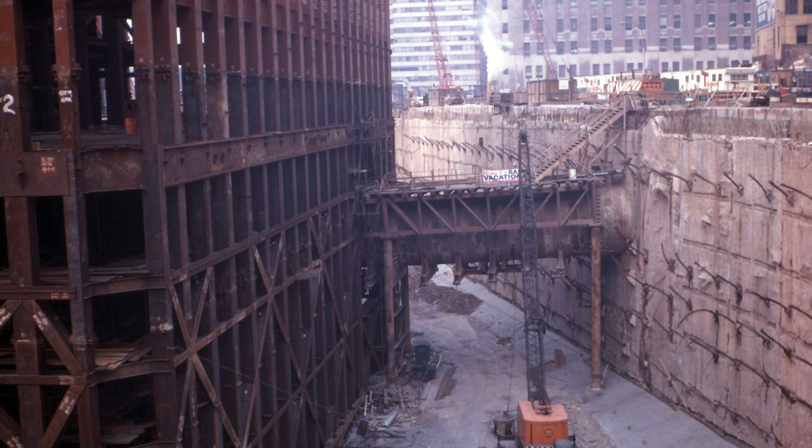All right guys, so today we are going to be talking about the long, extensive process that was the birth and the building of the Twin Towers. This was around a 20-year process that started all the way back in the 1940s, believe it or not. Of course, the towers weren't even theorized until the late 50s, and then the actual model came out in 1964.

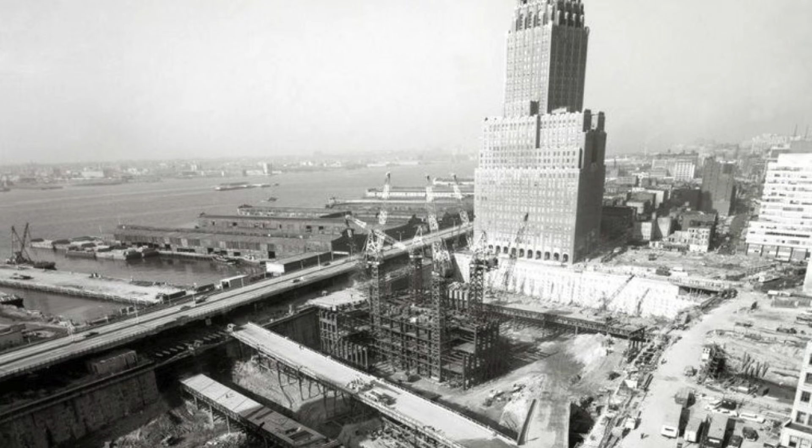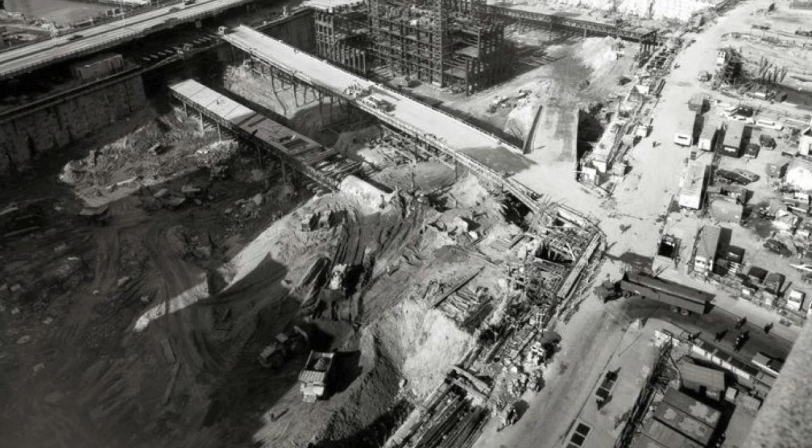But going all the way back to 1946, a year after World War II had formally ended, New York State passed a bill that called for a 'World Trade Center' to be established. This trade center would increase New York City's role in transatlantic trade. The World Trade Corporation was founded, and a board was appointed by New York Governor at the time, Thomas E. Dewey, to develop plans for the project.

Construction starts on One World Trade Center. Now, One World Trade Center was the North Tower. It was taller than the South World Trade Center despite being identical—the reason it was taller was because of the antenna. If you ever have trouble determining north versus south, the antenna is the easiest way. The north was always bigger, and it started construction first, in August of 1968, so it had a little bit of a head start on the south.

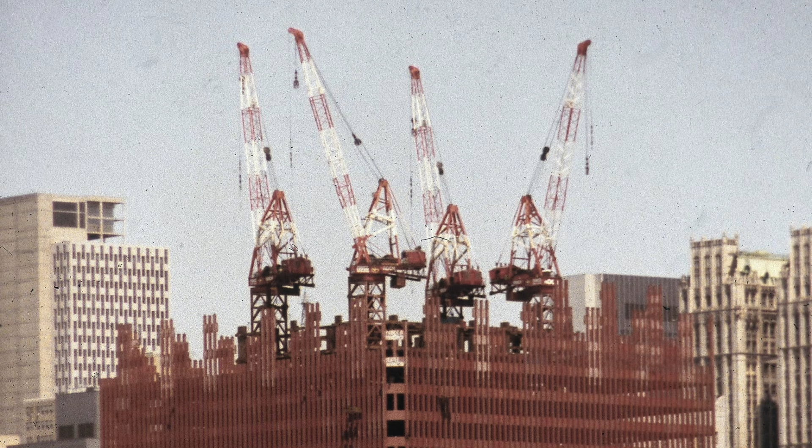I've done a review on it—basically it split in half when the South Tower fell, and then it was completely destroyed outside of one of its corners when the North Tower came down in regards to 9/11.

One World Trade Center was officially opened in 1970, with Two World Trade Center opening in January of '72—about a year apart in terms of the North and the South Tower, with the North opening first. The entire complex with all 7 buildings was officially completed in May of 1987.

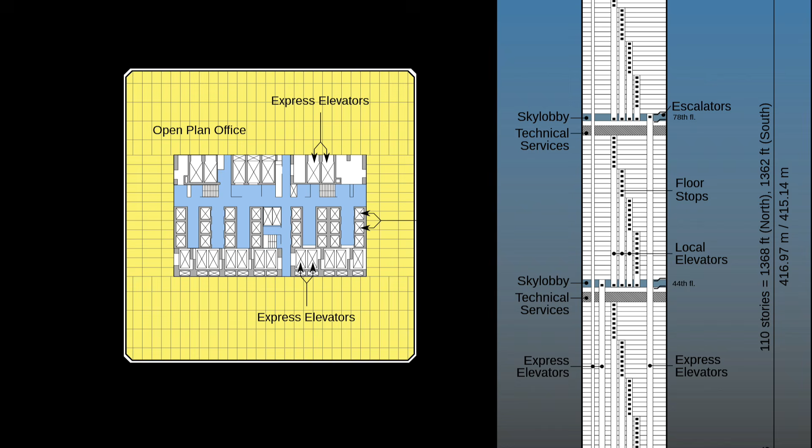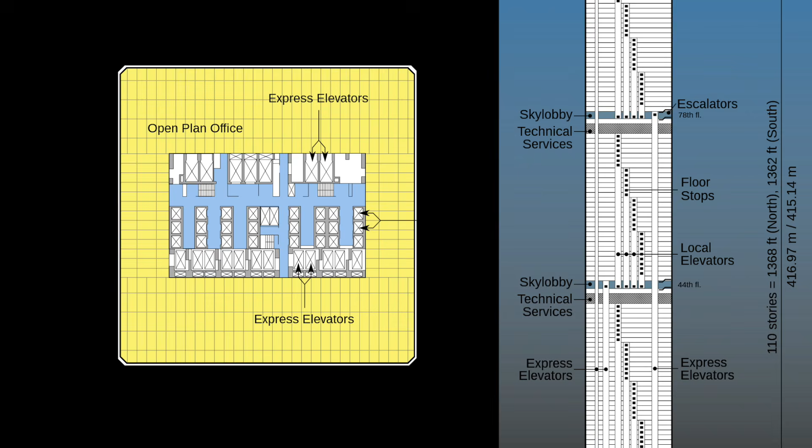One of the major limiting factors in the building's design was the elevators. As the building got taller, more elevators were needed to service it, which required more elevator banks that in turn took up space. The architects and engineers decided to use a new system that included sky lobbies—floors where people can switch from a large capacity express elevator, which goes only to the sky lobbies, to a local elevator that goes to each floor in a section.

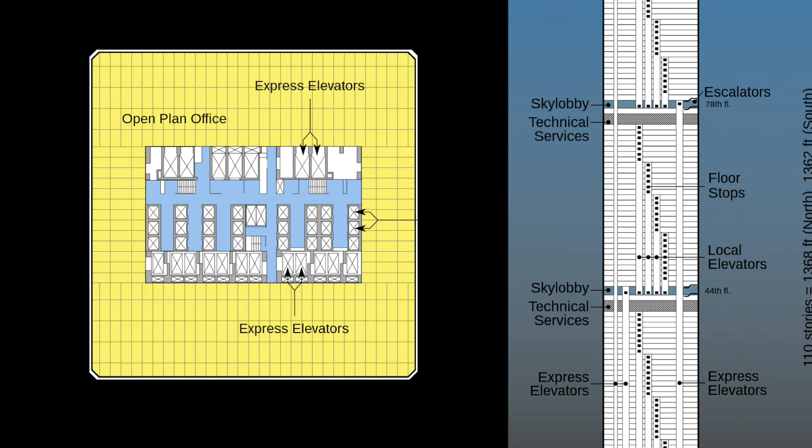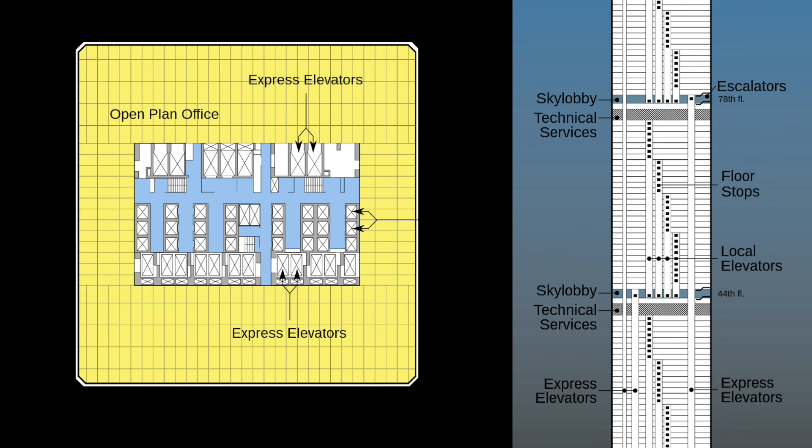Thus, the local elevators can be stacked within the same elevator shaft, located on the 44th and 78th floors in each tower. The sky lobbies enabled the elevators to be used efficiently, while also increasing the amount of usable space for each floor from 62 to 75%, by reducing the number of required elevator shafts.

The World Trade Center towers were the second super tall buildings to use sky lobbies, after the John Hancock Center in Chicago. The system was inspired originally by the New York City subway. The initial Twin Towers World Trade Center complex design was unveiled in January of 1964, with an 8-foot model.

The towers had a square plan, approximately 207 feet in dimension on each side. The buildings were designed with narrow office windows, only 18 inches wide, which reflected the lead architect's fear of heights and the desire to make building occupants feel more secure. The windows only covered 30% of the building's exteriors, making them look like solid metal slabs from a distance.

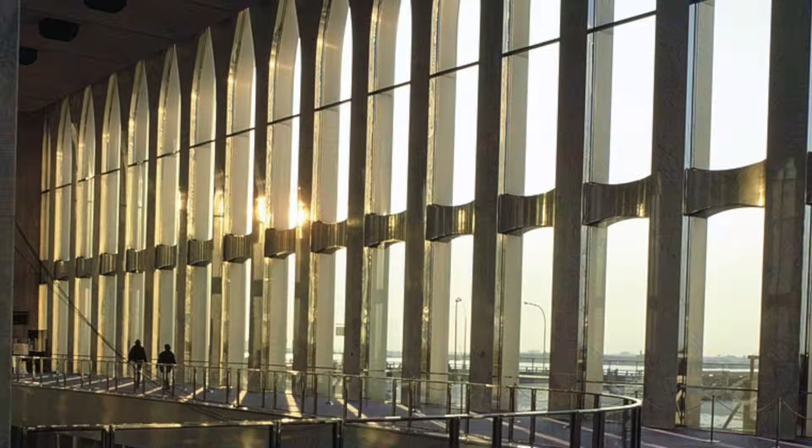That's a huge part of the main design when it comes to the World Trade Center, the Twin Towers, something we'd never see today. The windows only covered 30% of the building. Of course, when you look at the new One World Trade Center, it's all windows and only windows. That's part of the idea.

We've theorized if the Twin Towers were still up today, they'd probably be very obsolete at this point based on their design, based on the lack of windows, really looking like metal slabs in the sky. But the idea of the Twin Towers, and the reason they could get away with being so simplistic, is because it's very rare and unique to have two massive identical skyscrapers located right next to each other. That's one of the fascinating things about the Twin Towers and why they built the design the way they did. You can see the open floor plan with the core columns in the middle.

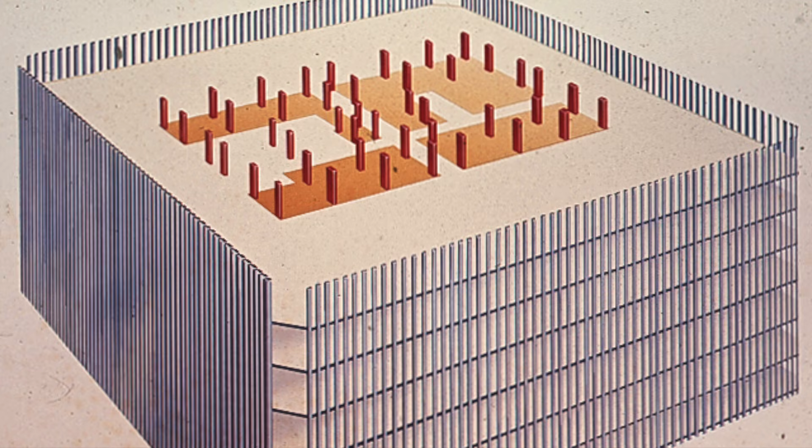I've talked about the core columns several different times. The core columns actually did stay up when the building collapsed, about 15 to 25 seconds after, for both the North and South Tower. The core columns housed mainly the elevator shafts, along with a few bathrooms and some other storage areas.

During the design process, wind tunnel tests were done at Colorado State University and at the National Physical Laboratory in the UK to establish design wind pressures the towers could be subjected to, and the structural response to those forces. The experiments evaluated how much sway occupants could tolerate, and when both the North and South Tower were impacted by the planes, they both swayed significantly, which is a design feature of both buildings. There are stabilized images of both towers - actually I believe only stabilized images of the second plane impact into the South Tower. Yes, it sways back and forth; it's designed to move with wind gusts.

Obviously it wasn't designed to withstand something like that, but heavy things - they also did talk about a potential aircraft impact, because these are massive skyscrapers in New York City. The structural engineers on the project also considered the possibility that an aircraft could crash into the building.

In July of 1945, a B-25 bomber that was lost in fog crashed into the 78th and 79th floors of the Empire State Building. A year later, another airplane crashed into the 40 Wall Street building, and there were other close calls at the Empire State Building. The architects considered the scenario of a potential impact of a jet airliner, the Boeing 707, which might be lost in fog seeking to land at JFK or Newark airports. So they were wary of a potential aircraft impact to the Twin Towers, but they thought the only real way that could happen would be through an airliner lost in fog, not traveling 480 to 520 miles per hour.

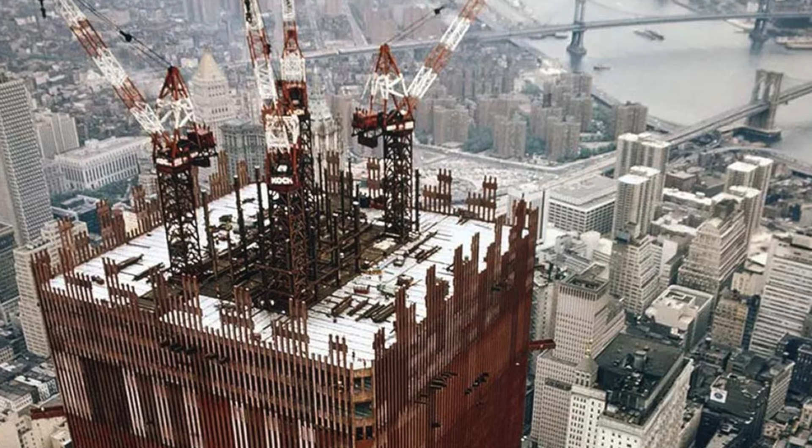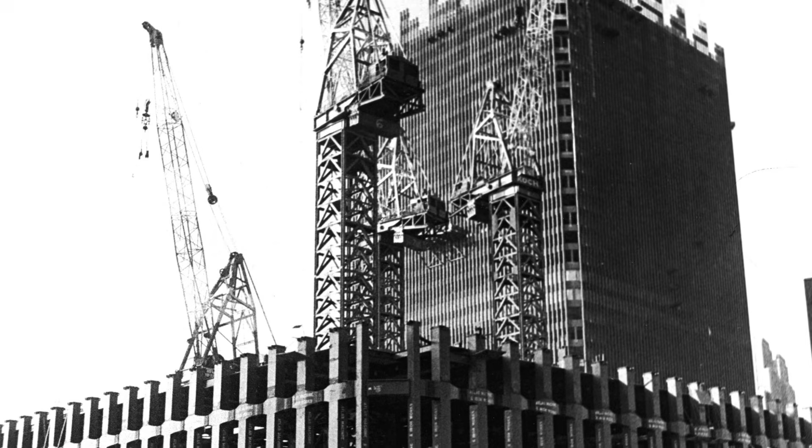When it comes to renovations within the Twin Towers, over time numerous structural modifications were made to suit the needs of tenants. Some steel beams in the core were reinforced and strengthened to accommodate heavy lift loads, such as large amounts of heavy files that tenants had on their floors.

Repairs to structural elements on the lower level of One World Trade Center were made following the 1993 bombing. The greatest damage occurred on levels B1 and B2, with significant structural damage also on level B3. There also was a potential World Trade Center complex renovation that never happened - renovating the entire plaza, adding some type of overhang combined with steel cables connecting both Twin Towers. That would have been built in the 1990s, but it never ended up going up.

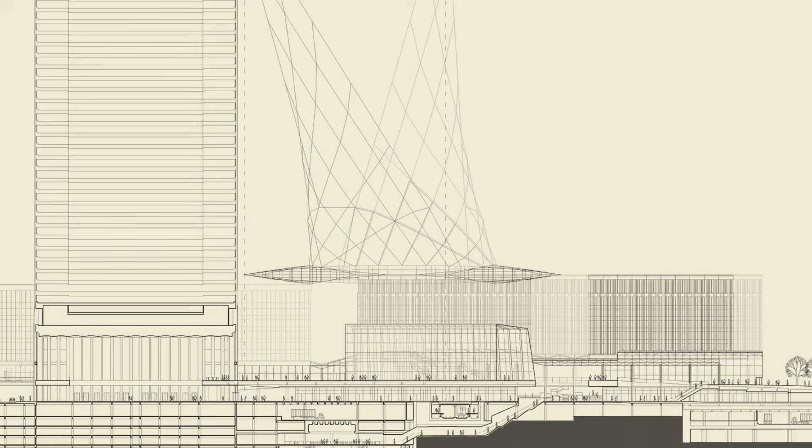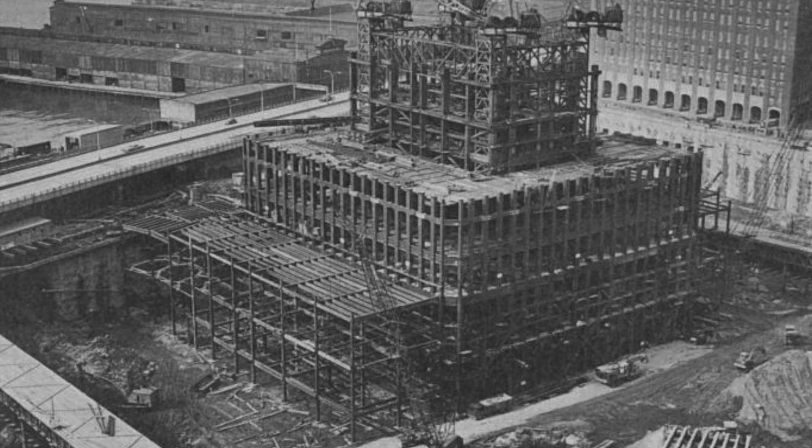Either way guys, that is the original design process of the Twin Towers. The most interesting thing, another fun fact - they actually had to build such a massive foundation. It was nicknamed the bathtub because it was so huge, since the complex needed such a massive area dug out really low, considering they needed to support both of these massive skyscrapers in the financial district of New York City.